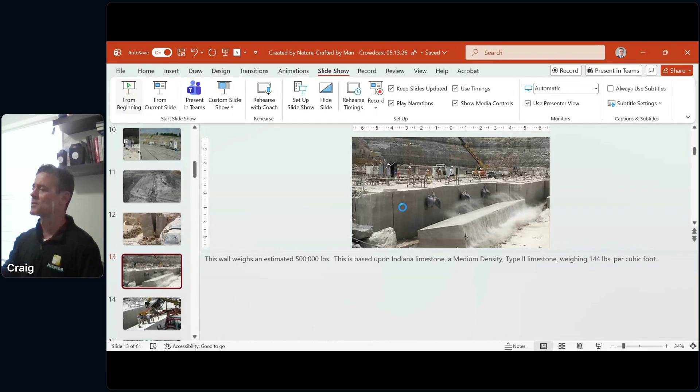Sorry about that. My name's Craig, I'm with Polycor Natural Stone. Today we're going to talk about Indiana limestone. A little background on me: I've been in the industry since 2009, both as a quarrier and a fabricator, working with dealers and stone fabricators, but also working with masons and general contractors on commercial and residential projects.

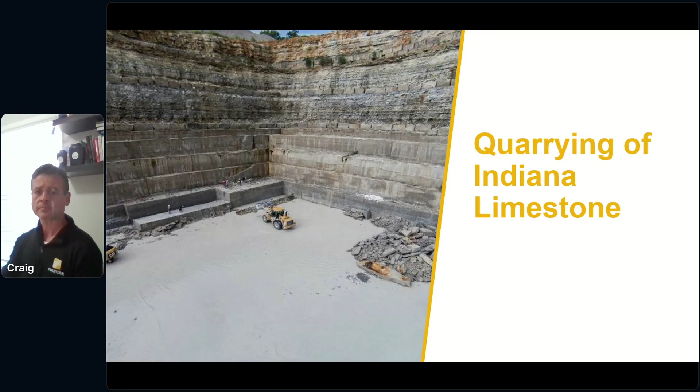Now we'll move on to the quarrying of Indiana limestone. Here we see the cross section of a typical Indiana limestone quarry.

That upper layer, the St. Louis layer, we refer to as overburden. It has no dimensional capability, so we drill and blast it and haul it away to expose the Salem layer, which is true Indiana limestone. That St. Louis layer doesn't go to waste—it's generally crushed into aggregate and used for construction fill and road DOT purposes.

Once we expose that Salem layer, we start to set up our quarry equipment to begin sawing the stone out of the deposit. Each Salem layer will have a range of anywhere from 3 to 5 ledges or benches. You can see the sawn ledges or benches in this photo. Each ledge is roughly 12 feet in height, and directly below the Salem layer is a layer called the Harrodsburg layer.

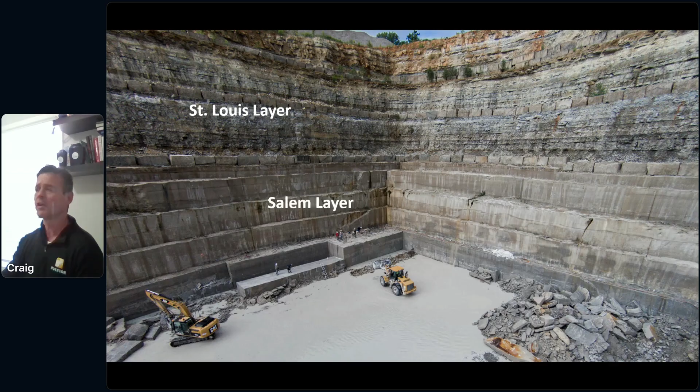Just like the St. Louis layer, the Harrodsburg layer has no dimensional capability, so once we hit it, we cease quarrying in that area and move on to another area within the quarry. Now that the overburden has been removed, we bring in our quarry saws and set up. We map out our quarry ledge to try to extract the highest quality, highest yield Indiana limestone we can, because that's what our fabricators want to provide on your designed projects.

Our general quarry saw is basically a big chainsaw with a diamond belt on it. Typical quarry cuts are spaced about 4 foot 6 inches apart, roughly 12 feet in depth—that depth determined by the length of the quarry saw—and those cuts generally run about 54 feet in length.

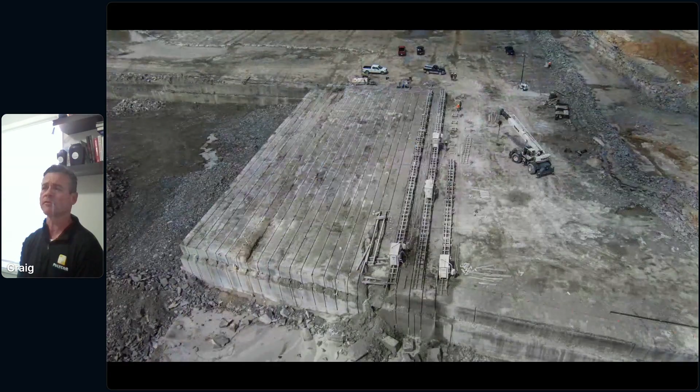Most quarries will come in and cut up the entire ledge, and once it's all cut up, the saw crew moves to another area of the quarry. Here's where the extraction crew comes in and begins extracting the Indiana limestone from the deposit.

The first step is to lay down a soft bedding material. We're going to tip over those cuts, those walls that the saw crew cut up on the ledge, so we can break them into smaller, more manageable sized blocks. The soft bedding material is just a pile of dirt and rocks and mud, and it softens the fall of that wall turning.

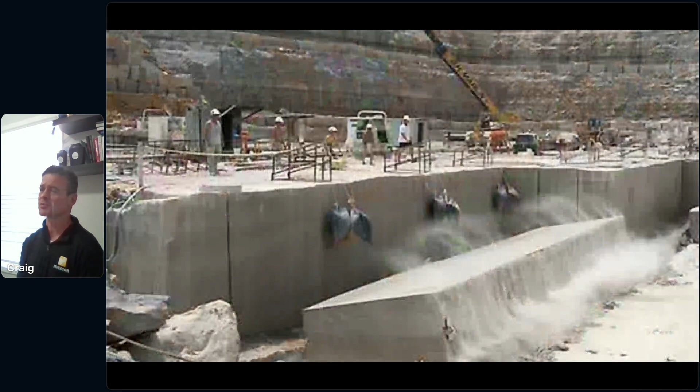In order to turn that wall, we slide several airbags into the quarry cut, inflate those airbags, and push the wall over. Here we can see a wall that's just been pushed over—you can see the inflated airbags there.

Remember, Indiana limestone is a medium density type 2 limestone weighing 144 pounds per cubic foot. Based on that, this 54 foot long wall, 4.5 feet thick and 12 feet tall, is going to weigh about 500,000 pounds—not a whole lot we can do with a 500,000 pound piece of Indiana limestone.

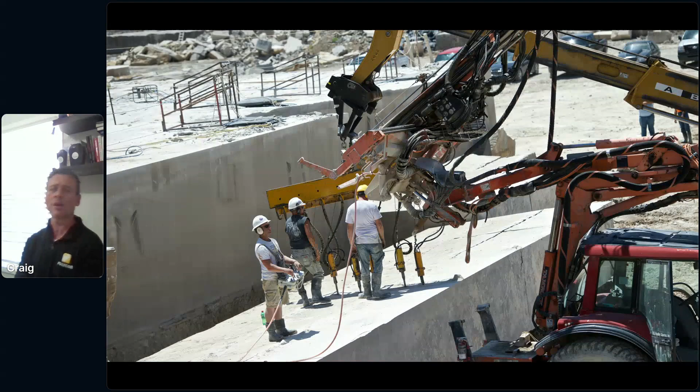So the next step is to break that wall up into smaller, more manageable sized pieces. Our quarry crew will come in and, just like they did the quarry ledge, map out that turned wall, looking for any defects within the stone to work around, again to provide the highest quality Indiana limestone to our fabricators and projects. In this step they'll map it out, and here you can see the two pieces of equipment.

The orange piece of equipment is a drilling rig. We mark where we want to break that block and drill 36-inch deep holes, spaced about 12 to 16 inches apart, where we want it to break. Then the yellow piece of equipment uses hydraulic splitting pins, which get inserted into those drill holes. They increase in size hydraulically and put just enough pressure on the stone to break it exactly where we want it to break.

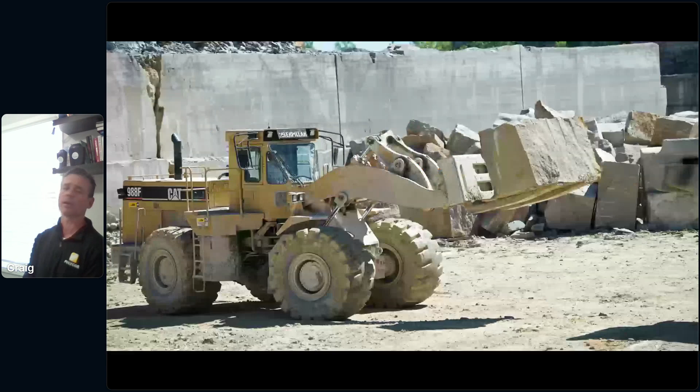Here you can see one of those smaller, more manageable sized blocks being hauled out to the grading yard to meet the next step of the process.

At this point, that process is we look at those stone blocks and identify the color of the stone, the grade, looking at the grain of the stone, and then we identify the usable measurements of each block. All of this gets cataloged into our computer system and followed with a barcode so that we can process that through our system in preparation for sale.

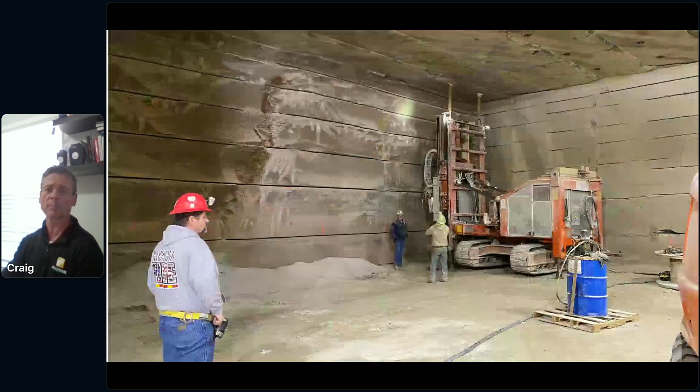So now, all of that being said, what I just showed you we generally refer to as open pit mining. And a couple of quarriers in our industry are now starting to delve into underground quarrying.

Unique about this is, one, underground quarrying can occur year round. With open pit or open mining quarrying, there's water that's used in the process, and water that's saturated in the stone, so quarriers have to be really careful about quarrying in extremely cold temperatures, which would freeze equipment and freeze blocks, rendering them useless. Underground quarrying eliminates that worry.

Another benefit is we can quarry year round as an underground quarrier, but also we eliminate the step of needing to strip away all of that overburden, which is a timely and expensive process. So we can eliminate that part of the quarry process, making it less disruptive. Now, one of the caveats to the underground quarry method is it can be a slightly slower process.

With both processes, we believe the underground quarry process tends to extend the amount of Indiana limestone available out of that roughly 3 mile wide by 28 mile long deposit to about 1,000 years of availability. With present open mining extraction, we're probably looking at about 500 to 600 years of Indiana limestone available for extraction and sale. So none of us have to worry about running out of Indiana limestone anytime soon.

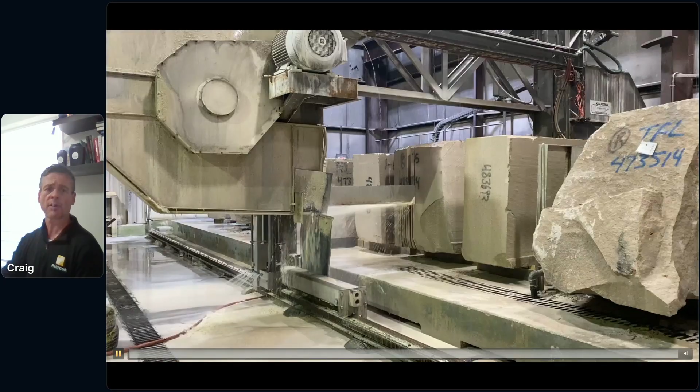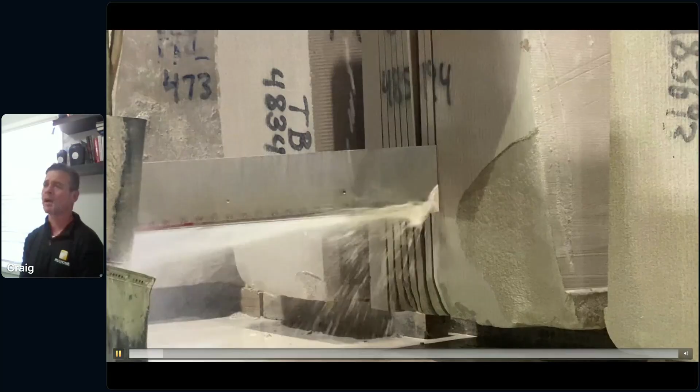Okay, so here we go with the beginning of our fabrication video. Every block's fabrication starts with the block being sawn, and the thickness of those slabs will be determined by what you draw on your drawings. This type of saw takes roughly 6 to 7 minutes to go through each cut on the block of stone. We use a lot of machinery to move stone around.

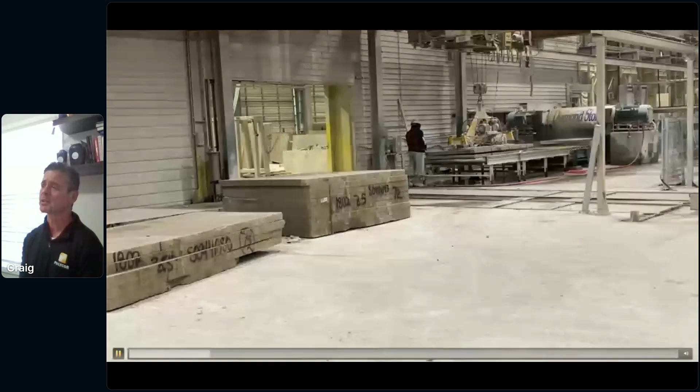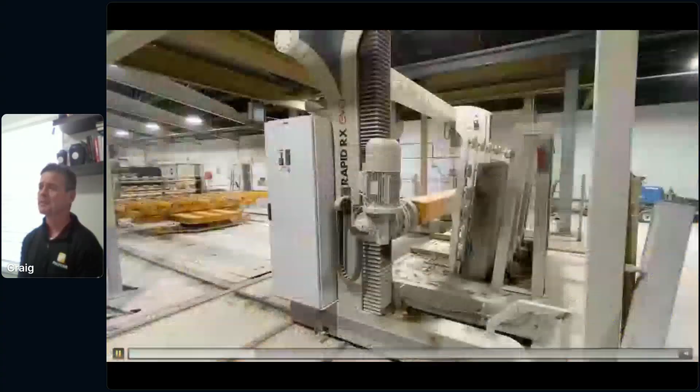Our industry likes repetition, so we use a lot of equipment that allows for repetition. Repetition is beneficial because it allows us to cut multiple pieces of stone, be very efficient in fabrication, and thus get the durability and value of a natural stone on your project at a budget conscious price. Here we just saw a saw cutting up 30 pieces of stone at one time.

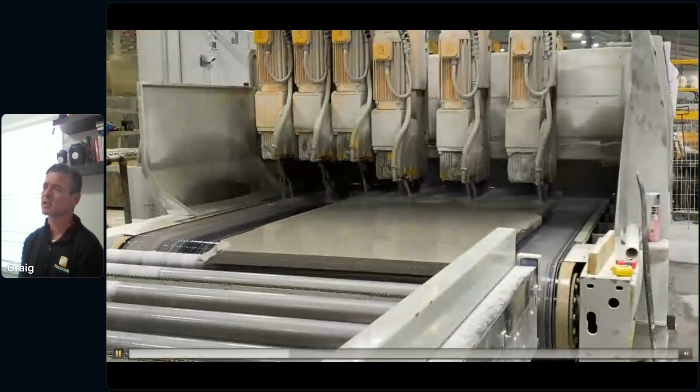Here we see another saw running 5 blades, currently cutting 3 pieces of stone out of a single slab at one time.

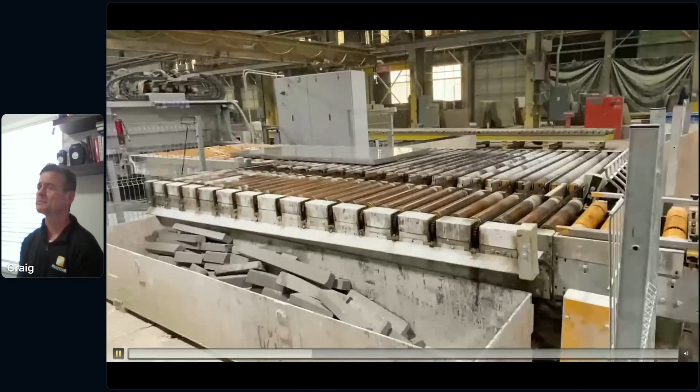The video here will get a little bit more exciting in a minute.

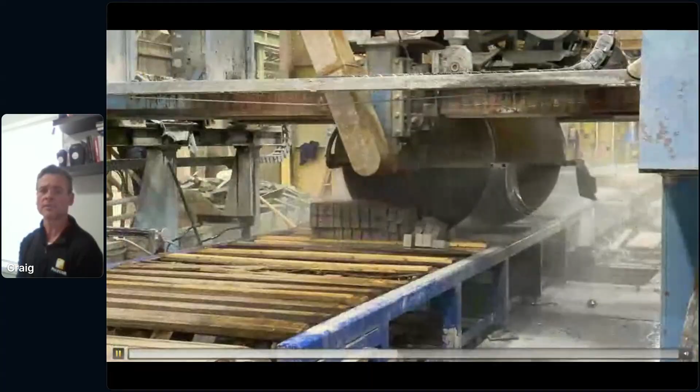Another saw cutting about 60 pieces of stone at one time. Here we see a breaker that is taking stone and putting pressure on it just enough to put a split finish on it. And here we see a pitching machine that's putting a chiseled edge onto long, flat pieces of Indiana limestone windowsills.

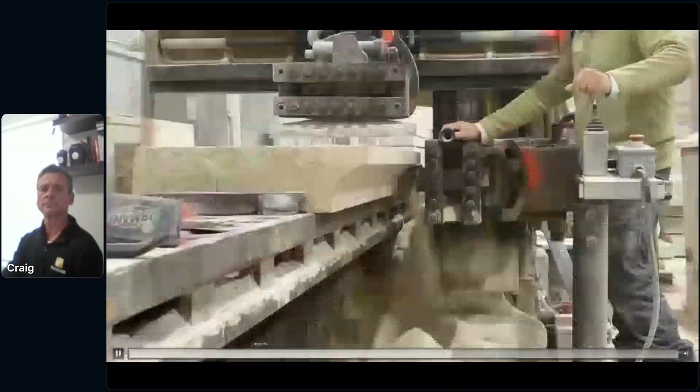Here's where it gets exciting. This is a traditional stone planer, in use since the start of our industry. It uses carbide bits shaped to the profile that you designed to shave the stone into the desired profile.

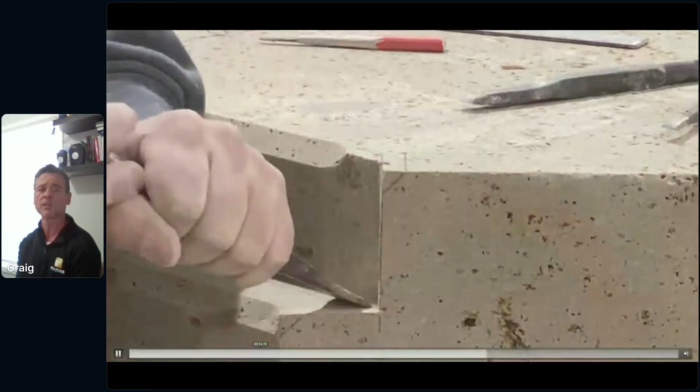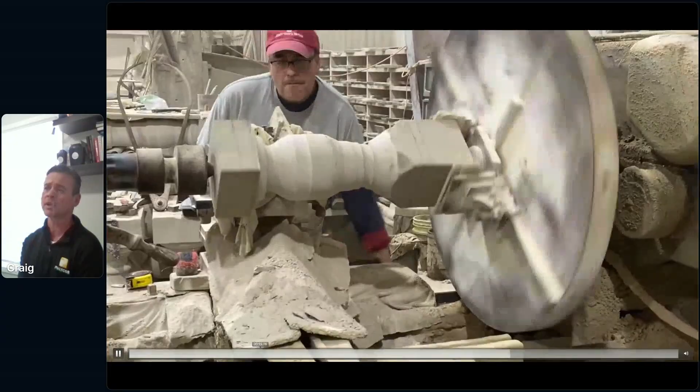We use a lot of hand cleaning up, hand carving, and chiseling to finish intricate details on pieces. This guy right here is quite an artist, using a visual template to turn balusters. It takes him about 30 minutes from start to finish, from a blank of stone to a finished baluster, to turn those on a stone lathe.

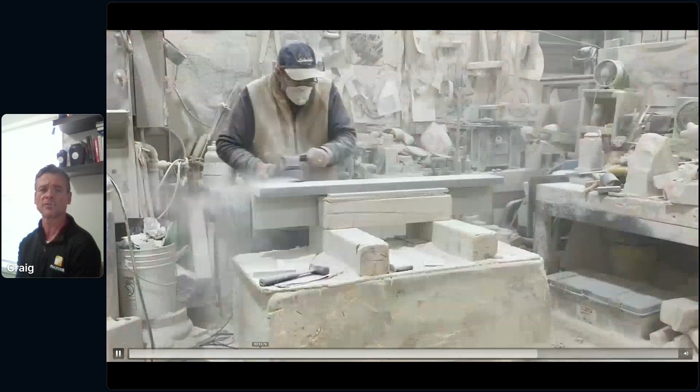A lot of hand equipment, a lot of grinders, a lot of dust used with Indiana limestone. And of course, as much as we like repetition, our fabricators can also cut single pieces of stone as a project needs.

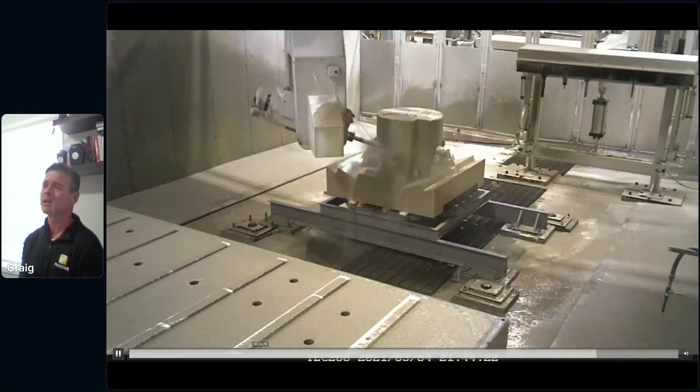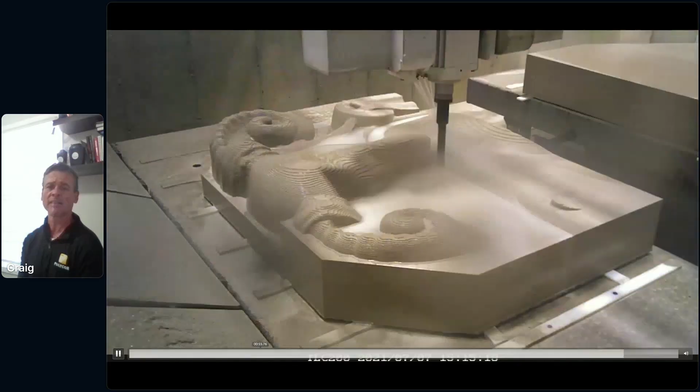CNC machines have been much more widely adopted by our stone fabricators in our industry. This is a 5-axis CNC machine that utilizes blades and router bits. Simply programmed, all the work is done in the programming. The slab is set on the saw table, the saw is turned on, and a fabricator can walk away at night and come back to a nearly finished carved piece of Indiana limestone.

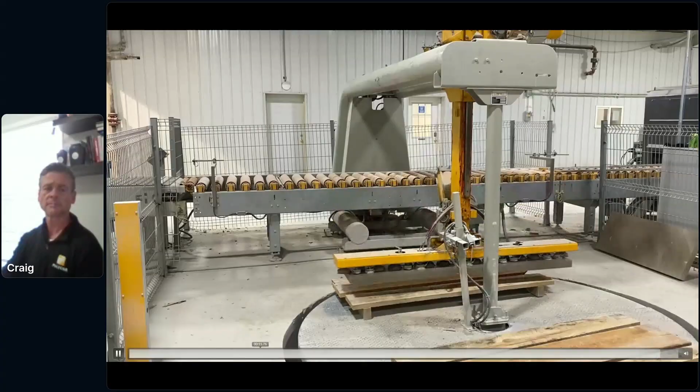Now, all that said, we still have a great group of hand carvers within the Indiana limestone industry. So while a CNC machine may be more advanced and more efficient, it can never quite express the authenticity that a hand carved piece of Indiana limestone, or a hand carved piece done by a talented stone carver, can.

And not knowing where all of you are located, if you have a stone fabricator nearby, I highly encourage that you take the time to visit with a stone fabricator. You're more than welcome to schedule a visit with our quarry. We'll take you through our quarry, through our mill, and to some of our local fabricators so you can see firsthand the art and the beauty of fabricating Indiana limestone.

So now we're going to look at some ideas around cost-effective fabrication, some things that I want you to know about the fabrication process as you're designing with Indiana limestone. First of all, let's talk panel size.

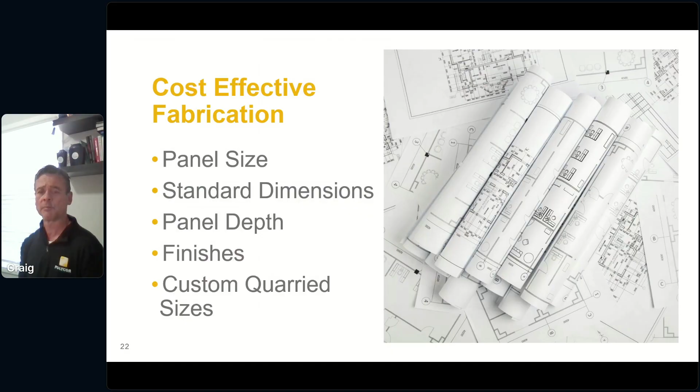Despite our general block size yielding a slab that's 4 foot by 8 foot, we can offer custom quarried sizes larger than that. It becomes a discussion on the front end of what the need is, what the volume is, and careful coordination with the quarry to work it into our quarry plan in time for your project. Generally the cutoff is around a 5 to 6 foot by 12 to 14 foot long block, at about 4 foot 6 inches in thickness. Then it's an issue of whether a block that size can be handled by both the quarry and the fabricator, but we always welcome those conversations.

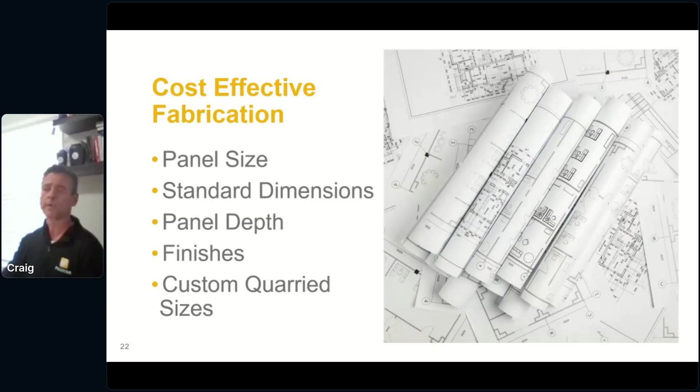So please bring those dreams of yours to us, and we'll walk through them with you.

Next up, we're going to talk about some basics in specifying Indiana limestone. In our quarries we get four colors: buff, silver buff, gray, and full color blend. Think back to that quarry cross section, and that top ledge within the Salem layer typically starts out as buff, and then as we move lower through the deposit, it turns gray.

It's thought that the color difference is explained by the oxidizing action of groundwater that has moved through the stone deposit over millions of years. It's believed that at one point all Indiana limestone was gray, and as groundwater moved through the deposit, it changed where it moved through to that buff color.

Where the buff and gray meet, that's what we call full color blend. It's characterized as an unspecified percentage mix of buff and gray. That's very important—an unspecified percentage mix. You don't get to choose, hey, I want it 50-50, it can be a range. It could be 50-50, 70-30, 90-10. So understand that when we pull out blocks of full color blend, that color mix will vary—it's unspecified. When a fabricator cuts stone out of that block, you'll get some pieces all gray, some all buff, and some with a transition of buff and gray within the piece. Full color blend really represents the beautiful range of colors quarried in an Indiana limestone quarry.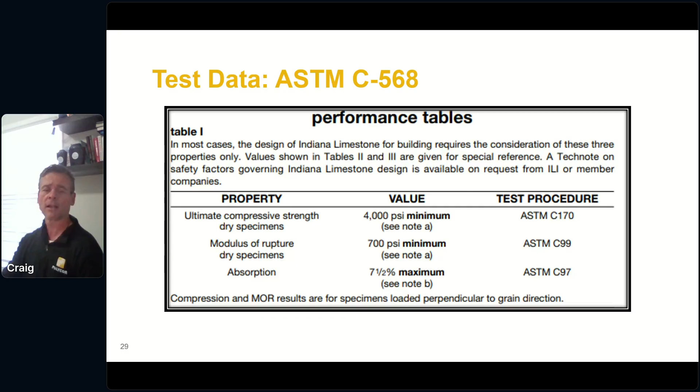Our Indiana limestone tests at about 4 to 5% absorption, so well below the maximum allowed of 7.5%. Modulus of rupture is upwards around 900 to 1,000 psi, so well above the minimum ASTM standard. And then ultimate compressive strength is in the 5,000 psi plus range, again well above the minimum required by ASTM standards.

Indiana limestone is capable of being self-supporting, and we have an Indiana Limestone Institute that backs up our industry, along with an Indiana Limestone Institute handbook. In that handbook, on page 37, is what's known as a beam and lintel table, a simple mathematical calculation that tells you, based on the span you're looking to cover, how tall and how deep your piece of Indiana limestone needs to be in order to be self-supporting.

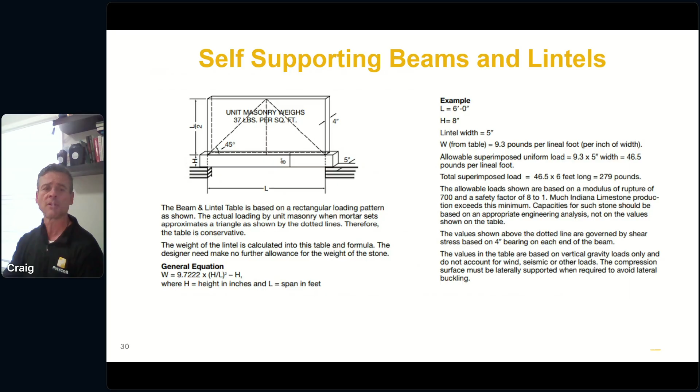We're happy to walk you through that calculation, or put you in touch with the director of the Indiana Limestone Institute to walk you through some of the technicalities. When specifying Indiana limestone used at, on, or below grade, it's very important to specify the use of a damp proofing material.

Indiana limestone is an absorptive stone. It's going to take on moisture and exhaust moisture from its surroundings. Sometimes this is called rising damp. If rising damp comes from a concrete slab, foundation, concrete block, or a mortar setting bed, the moisture will be alkali charged, and the stone will absorb that alkali charged moisture. The natural path is for the moisture to exhaust through the face of the stone, and when it does, it leaves those alkalis deposited on the face in the form of a brown, hazy stain.

Damp proofing is a cementitious barrier coat that's put on the back and sometimes the sides and bottom of the stone to prevent it from absorbing alkali charged moisture.

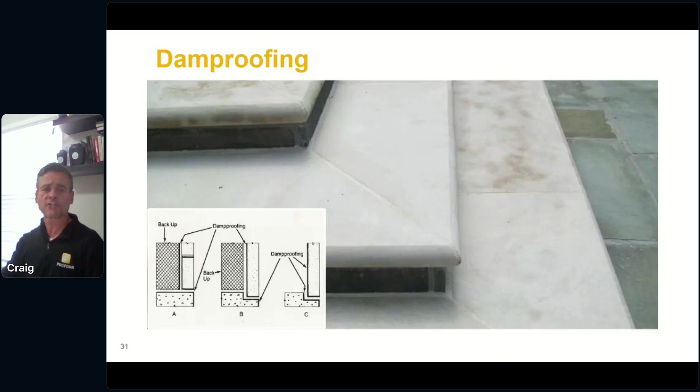Here is one of the most extreme examples I've ever seen of pool coping with alkali staining. The damp proofing step was skipped, and you can see on the left of the slide how severe that alkali staining can be. The good news is that it will eventually dissipate, dependent on the natural wetting, drying, and weathering the stone goes through as those alkalis weather away off the face. So it's a very important step to include in your specification, and do your best to make sure this part of the process doesn't get value-engineered out by the mason, installer, or general contractor.

While we don't recommend any particular supplemental products specifically, we do have some products we can steer you towards, and you can verify with the manufacturer of those products if they're a good fit for use on your project with Indiana limestone.

We get a lot of questions about anchor selection. We are not engineers, so we tend to shy away from offering too much direction regarding anchors. There are multiple factors that must be known and understood when considering the right anchor for your project. So very general advice: design with stainless steel anchors, or at a very minimum, hot dip galvanized anchors. I like stainless steel.

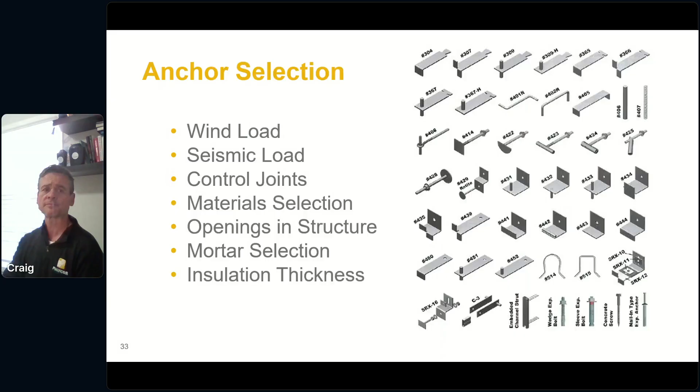Another big question we get asked is, what should I use to seal Indiana limestone? There are sealers out there you can use, but I don't recommend sealing Indiana limestone in exterior applications. Our stone is absorptive and should be allowed to breathe. Even breathable sealers may not allow moisture to exhaust rapidly enough, especially in areas with rapid freeze-thaw. Long-term trapping of moisture in the stone can result in cracking and spalling on the face, and eventual failure.

Additionally, when you seal Indiana limestone, or any stone for that matter, you may change the appearance of the stone. With a sealer being a coating, no sealer can be applied evenly on every piece of stone.

The stone may age at different rates, causing a very uneven and mottled look as the stone ages, caused by inconsistent sealer thickness during application.

Lastly, think about the maintenance cost of sealing. Once it's sealed, that sealer is only going to last for a period of time, anywhere from call it 3 to 7 years, and at that point it's probably going to need to be reapplied. Does your project owner know what that long-term maintenance cost is for continual resealing of the stone over the life of the building?

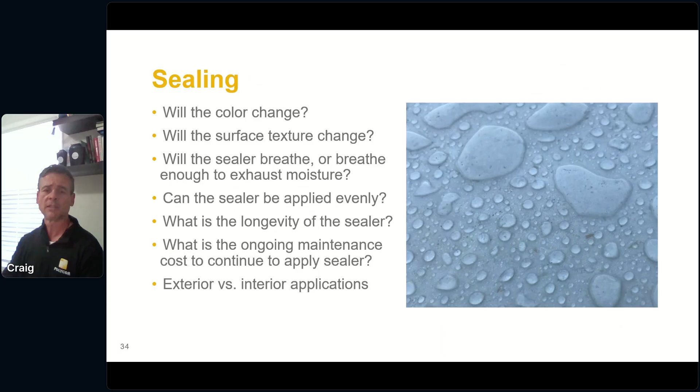The one area where I don't mind recommending sealing Indiana limestone would be interior applications, where the stone is not subject to any freeze-thaw activity. So my recommendation there is: the stone is quarried, fabricated, and installed. Let the stone sit in its environment for a period of time, ensuring that it's dried out before any sealer is applied.

Next up, we're going to talk about cleaning Indiana limestone. In general, the same cleaning recommendations apply, whether you're cleaning newly installed Indiana limestone or performing a general cleaning to remove dirt and organic matter. I always recommend starting with the least aggressive cleaning methods and adjusting based on the staining and cleaning required.

First recommendation: start with low pressure, clean water, and a soft bristle brush. Light detergents can be used. Something as simple as trisodium phosphate, which can be bought at any big box store, or even something like Dawn dishwashing detergent, can do wonders to remove stains from Indiana limestone.

In new construction, mortar smears can be cleaned first by knocking down the smear with a trowel, wetting the stone with water, and scrubbing with a soft bristle brush. You can use white vinegar to assist in melting that mortar smear off the face of the stone. There are also cleaners made that contain acid. Vinegar is an acid that can also help more easily remove that mortar smear from the face of the stone.

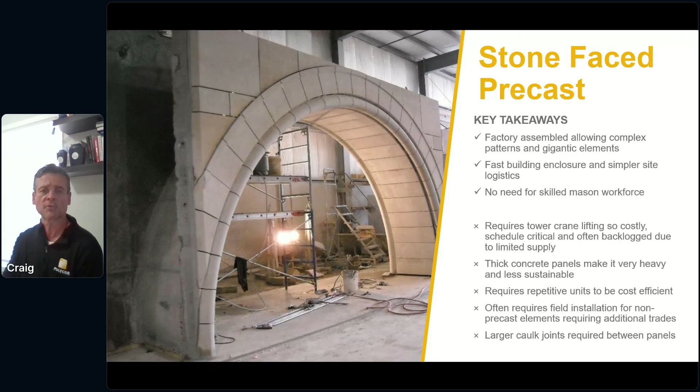This fabricated stone is laid face down in a mold. Anchor points are identified, and concrete is poured onto the back of the pieces of stone. Once that concrete is cured, it is pulled out of the mold. So you essentially have a very large panel with multiple pieces of Indiana limestone adhered to it, which is then shipped to the job site and lifted in place.

Most recently, one of the more familiar projects built using Indiana limestone on precast was Yankee Stadium. It was built in 2009, designed by Populous, and utilized 11,000 pieces of Indiana limestone.

Another method other than traditional masonry would be veneer rain screen. Aside from its rain screen benefits, stone as a veneer rain screen allows for very rapid installation, and any number of trades can quickly be trained on proper installation. In the system, an aluminum track is anchored to the building, and then the stone panels are attached to the track with clips. This is a great example where repetitive piece sizes are very helpful to simplify install and keep costs competitive.

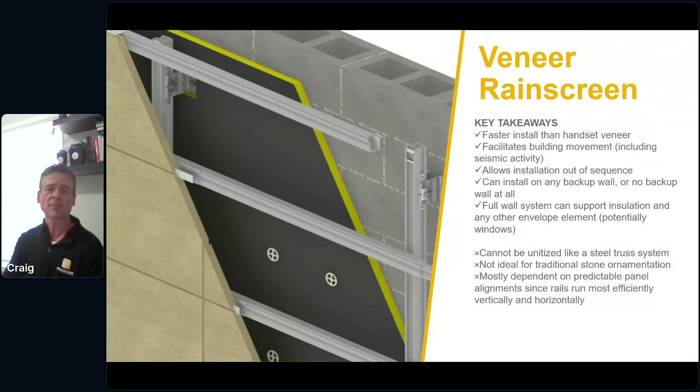An example of a project installed this way was the Patrick G. and Shirley Ryan Center for the Musical Arts at Northwestern University. This was designed by Goettsch Partners, completed in 2015, and used standard buff Indiana limestone.

In this type of product, a very thin piece of stone, about 3/8 of an inch, is laminated to aluminum honeycomb, then hung on the aluminum track system with clips. It's extremely lightweight and can be installed very rapidly, reducing install cost and reducing the structural requirements of a building since it doesn't have to manage the heavy weight of a full thickness panel of Indiana limestone.

Luddy Hall was completed in 2018, with Pelli Clarke Pelli as the design architect and Ratio, out of Indianapolis, acting as the executive architect.